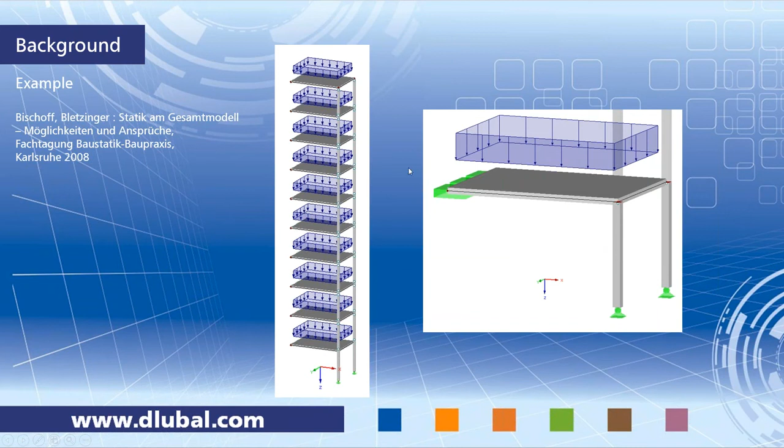The question is: does that calculation represent the real behavior of the build-up process, the real behavior of the structure? It's clear that the whole building with 10 stories is not built in just one second or one step—it's built step by step, meaning first the first story, then the next one, and so on. So the problem is that this staged construction is not part of the whole calculation, and this leads to wrong results.

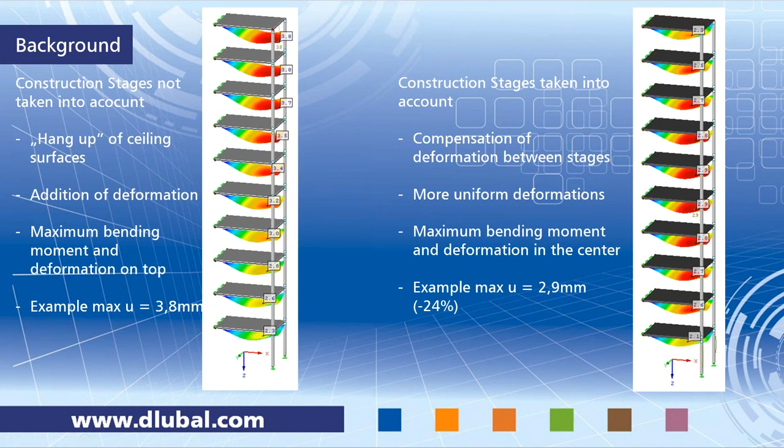So with this information about the construction stages calculation, we want to take a look at the features of our stages in the next slide. What are the features of stages?

Of course, you can add or remove elements. As I did in the example of the high-rise building, you can add columns, surfaces, and even solid elements in several stages. You can remove them, like for temporary columns, in the first or second stage, whatever you need. You can even modify elements - materials, hinges, and even supports.

You can also take nonlinear elements into account. That means you can follow tension elements, you can follow compression elements, because in our stages, the several stages are calculated by Newton-Raphson. And for a combination in a separate specific stage, you can use temporary loads.

That's the next point in this slide. What does it mean? For example, you have a temporary load like a crane or something like this in stage number 2, representing construction workers or a construction truck maybe, and you want to inspect a combination of different positions of this load.

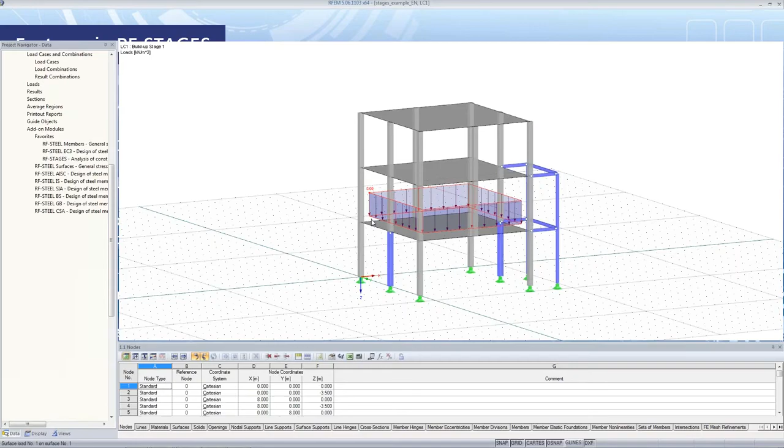So with these features, we want to move over to RFEM, and there I've already created a small model for today's webinar. We have a small building, concrete and steel.

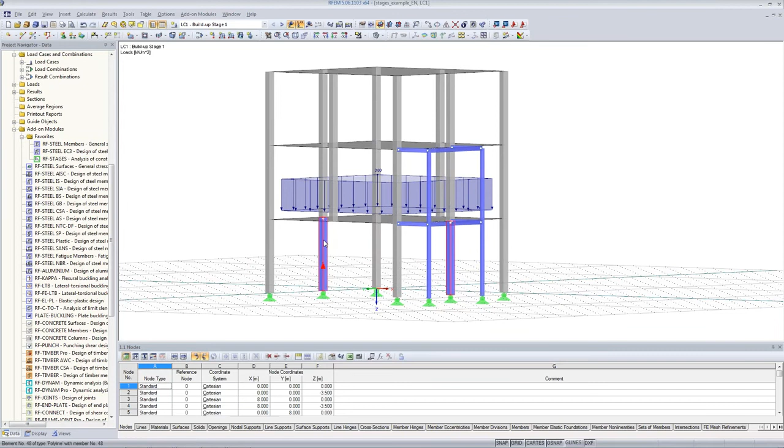We have 3 surfaces, a lot of concrete columns over there, and we have also temporary columns over there - these two steel columns and a small temporary platform.

I already created the load cases. It means we have build-up loads for stage 1, stage 2, and stage 3. And as you can see, it's an important fact that you have to split up the loads for the stages calculation. So I want to prepare 3 stages.

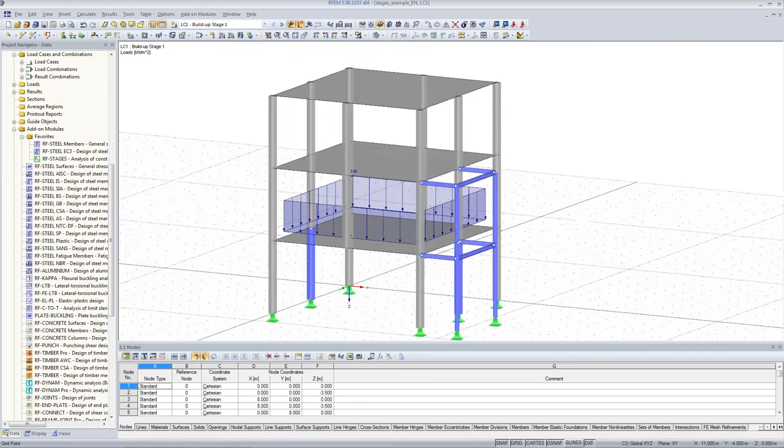That means the first stage is the bottom of the building, then the next part will be added in stage 2, and then the final stage, where I want to remove the temporary frame over there. In the second stage, I will already remove these 2 temporary columns. So it's important to split up the loads.

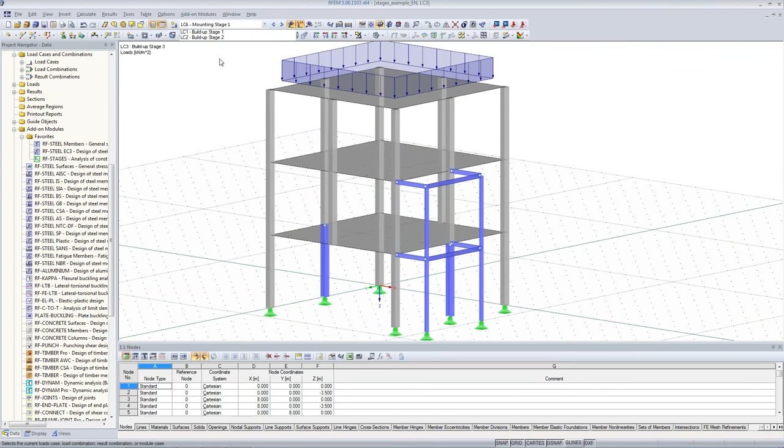This is built up for stage 1, stage 2, and stage 3. And we have also mounting loads - these are the temporary loads on our platform. So right now we want to start with the module of stages.

By double-clicking on this module, you will find general data, where you define the stages. We have 3 stages here. You can write down a description, or use a template like construction stage 1, 2, and stage 3.

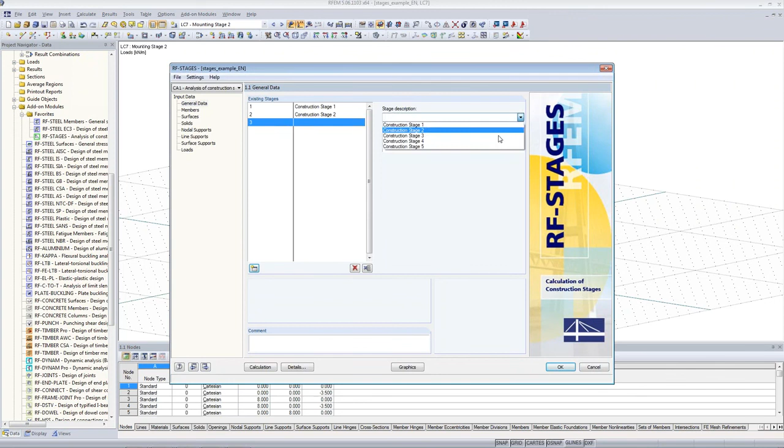Then we go on to the members dialog, where you add the members that will be added, removed, or modified in the particular stage. In stage 1, you cannot modify, delete, or remove anything since there's no stage before it. So we start by adding something: these are all the columns, and the 3...

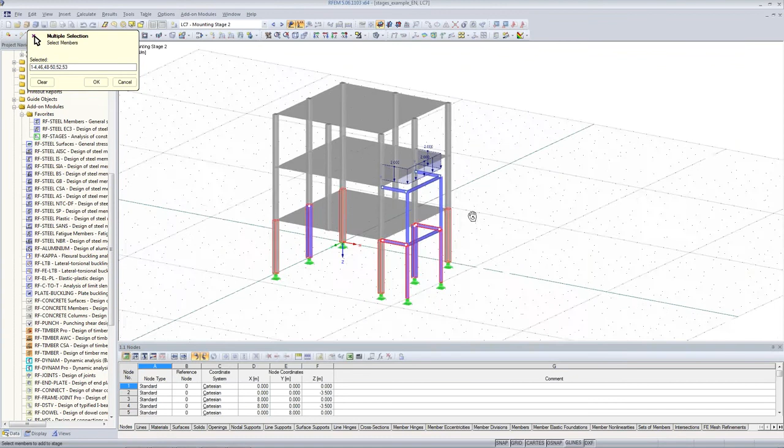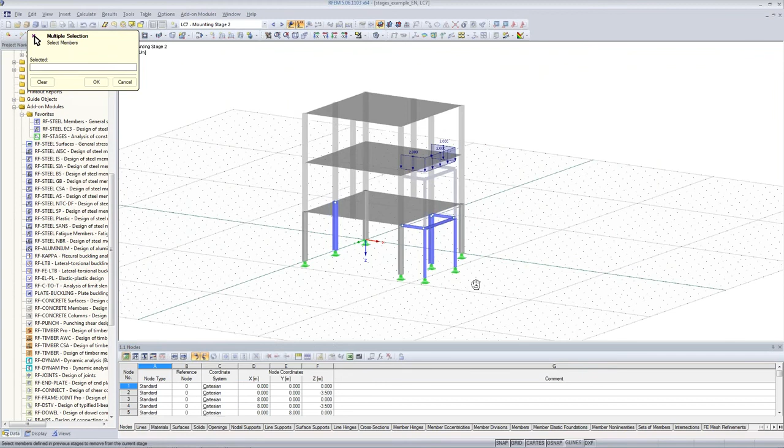...horizontal steel beams. In the next stage, we want to add not these columns, but these members. And we want to remove the 2 temporary columns at the bottom of the building. In the last stage, we build up the concrete columns on the 3rd floor and remove the temporary frame. As you can see in the graphic, you can follow the selection in the RFEM background.

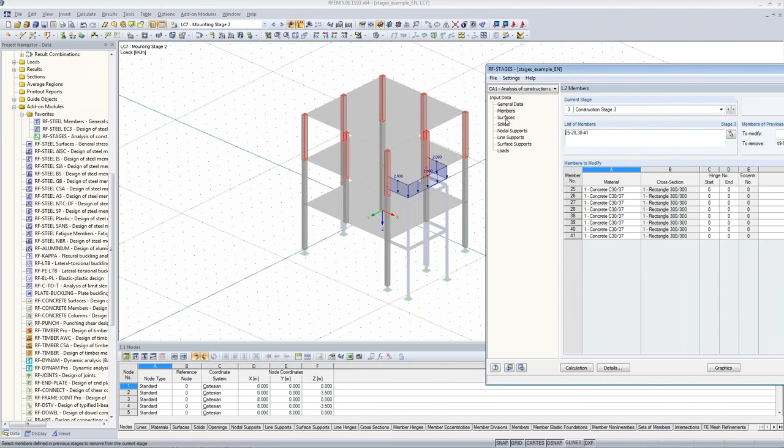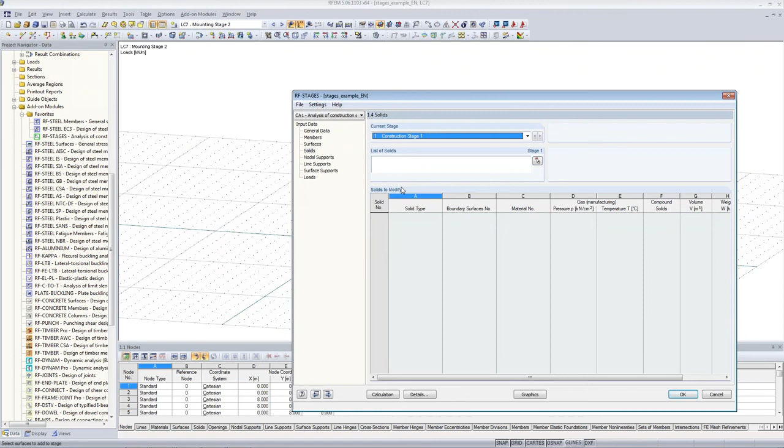So, construction stage 1, 2, and 3. Now we want to add the surfaces. That's quite easy: stage 1, surface 1; stage 2, surface number 2; and in the last stage, the roof surface. We don't have any solids in this model, so we can go on to the nodal supports.

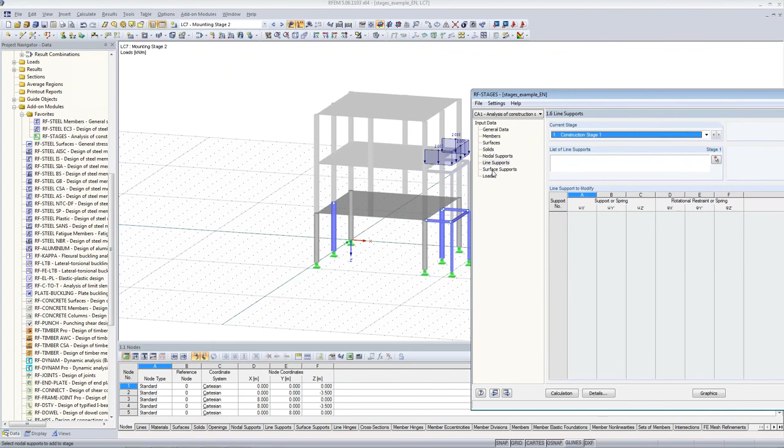We will just select all of them. We don't have to remove the nodal supports because the temporary columns will be removed anyway, so there will be no load left on them, and we can leave it as it is for all the stages. We don't have any line supports or surface supports either, so we can go on to the loads.

In our stages, it's possible, as you can see in this mask, to add permanent or temporary loads. The permanent loads are, for example, self-weight, or any load case or load combination that should be taken into account in every stage. So it's a constant load for all the stages, like build-up loads and live loads.

In this example, I created load combinations for the several stages. You can also use load cases or load combinations, or even use them together. In stage 1, I prepared load combination number 1, so I add this. Stage 2 has its loading as a combination, and so does stage number 3.

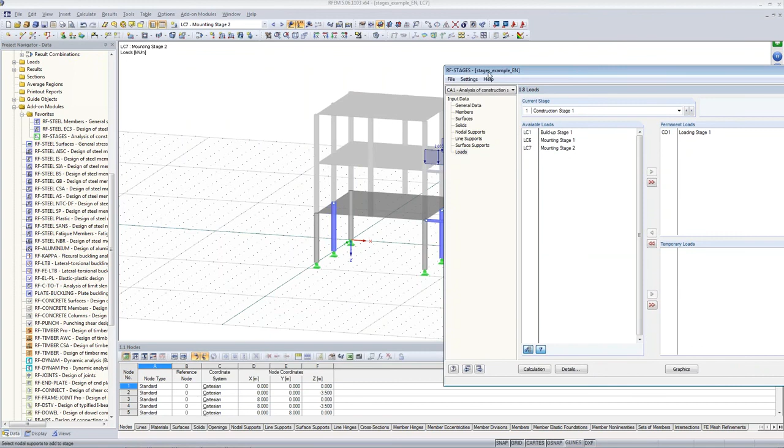What about the self-weight? Self-weight is a special type of load in RF-STAGES. You can add the self-weight as a separate load case for every stage. In this example, I could create 3 load cases of self-weight, but this is quite time-consuming, and in this combination there is no self-weight active because we can use the 'assign self-weight to all stages' checkbox.

And because I used partial safety factors in the load combinations, I want to change the factor in self-weight Z to 1.35, for example. On the lower left side, you can find the alignment of new elements, like initial position, which is exactly the same as in RFEM, or tangential position, which is the position of a new element relative to the last stage before—this might be more important for bridge construction.

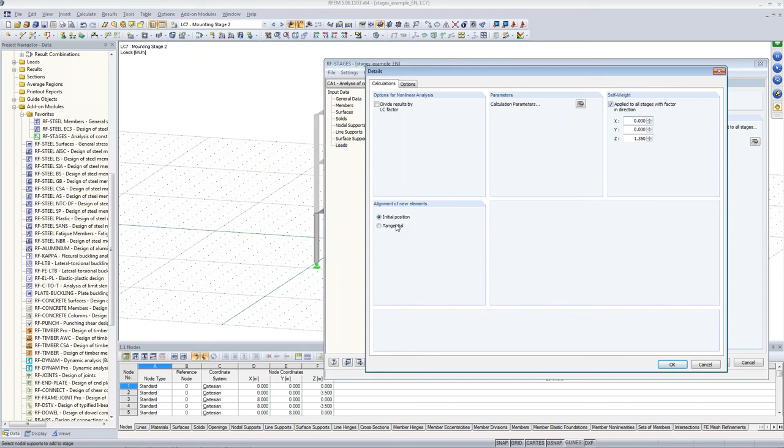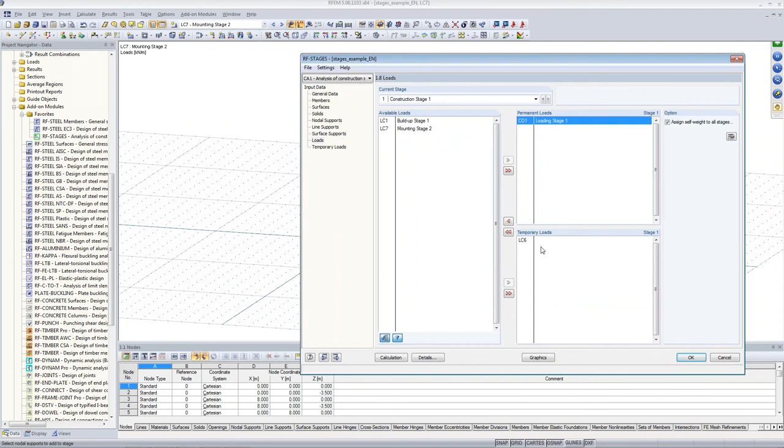What else? We have 2 mounting load cases, and these should act only in their separate load stage. So I'll add load case number 6, mounting stage 1, as a temporary load case for stage 1, and mounting stage 2 as a temporary load case in the second construction stage.

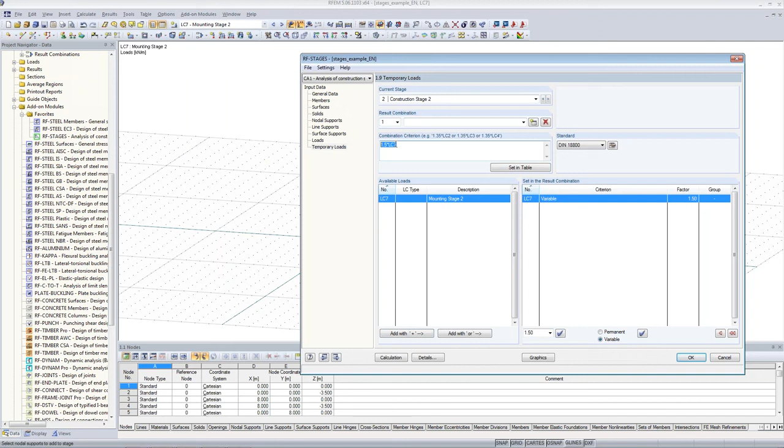To combine more than one load case, you could use temporary loads, but in our example we have just one mounting load case. So I'll add it with a factor of 1.5 for construction stage 1, and the next one for stage 2, also with a factor of 1.5, load case 7.

And with these definitions, we can start the calculation. You can see that there's a separate calculation for each construction stage.

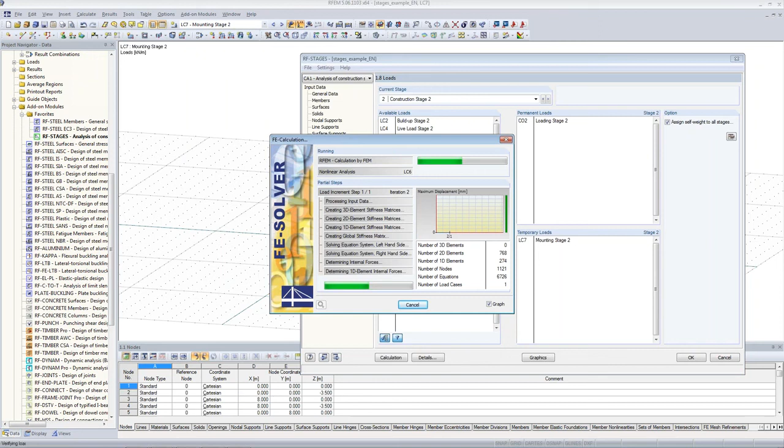After that, all these results are combined together as an envelope of all construction stages. So you can check the results in RFEM in several tables: results, nodal supports, for example, construction stage 1, the temporary load cases, and an envelope of all the construction stages, including temporary stages.

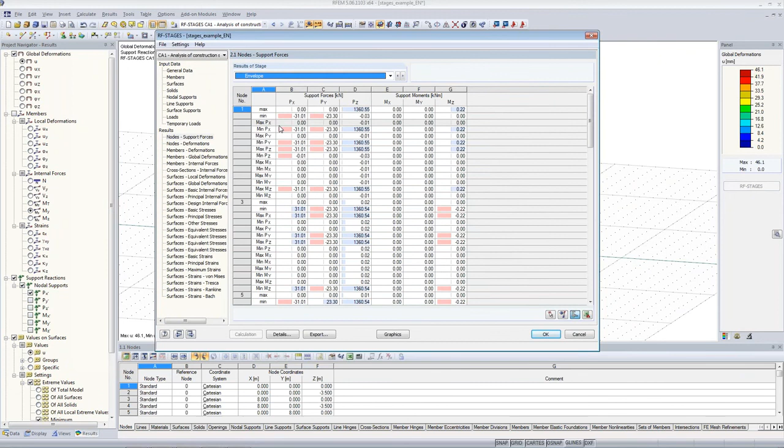Right now I could do nothing with these results. I can do no design because they are just in the module. To export them to RFEM, you can easily click on the export button, exit the module, and you will get result combinations in RFEM.

Right now we can just stay in the module and check the results in the graphic. On the right side you'll find a panel with the envelope, or you can take a look at one PLC, which is the permanent load case, permanent loads for stage 1.

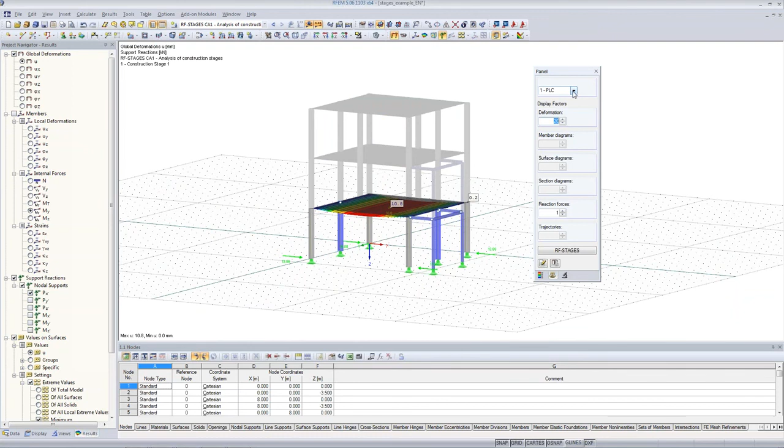We can take a closer look at the structure, and you can see that there was a temporary steel column, and there are no deformations over there. In the next stage, this column is removed.

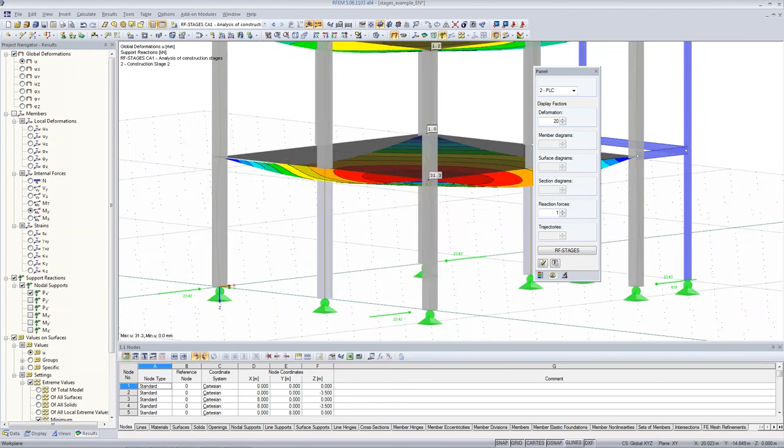In the next stage, this column is removed. It's in the background right now. You cannot select anything, and you can see a deformation on the ceiling in the second stage.

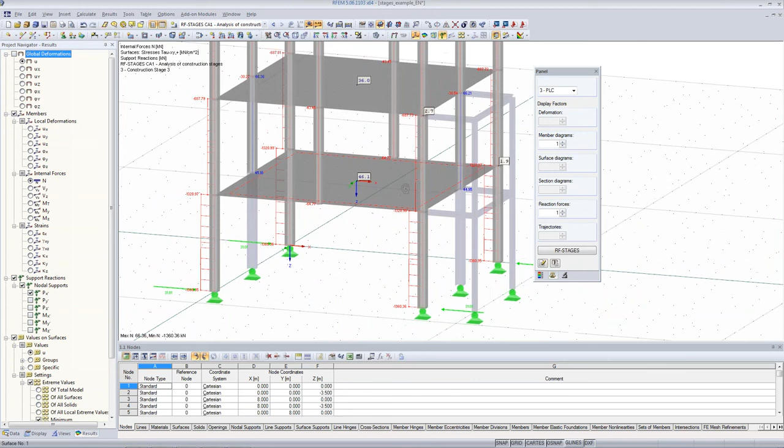You can check the normal forces in the temporary frame, and in the third stage you can see that this frame is also in the background. It's grayed out, so there's nothing there. It's removed in the last stage, and this is the final result, or final stage.

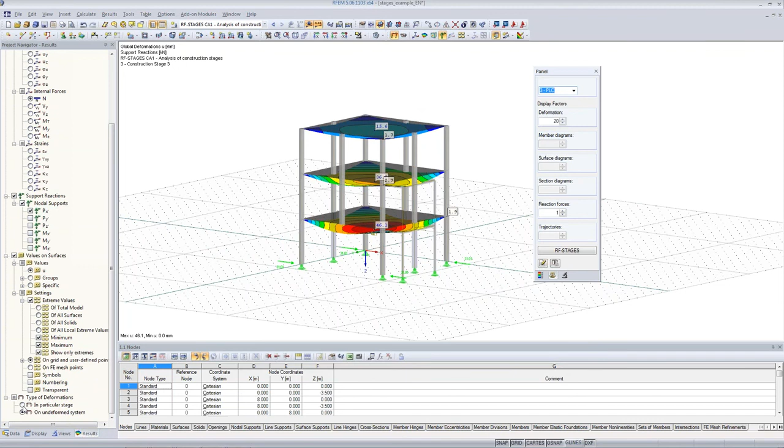I also talked about a feature to show the type of deformation, meaning an undeformed system or in the particular stage. If I want to know how large the deformation is in the last stage of the structure, I can change this option to 'in particular stage,' and you can see that in the last stage you get an additional deformation of 15.6 millimeters on the structure.

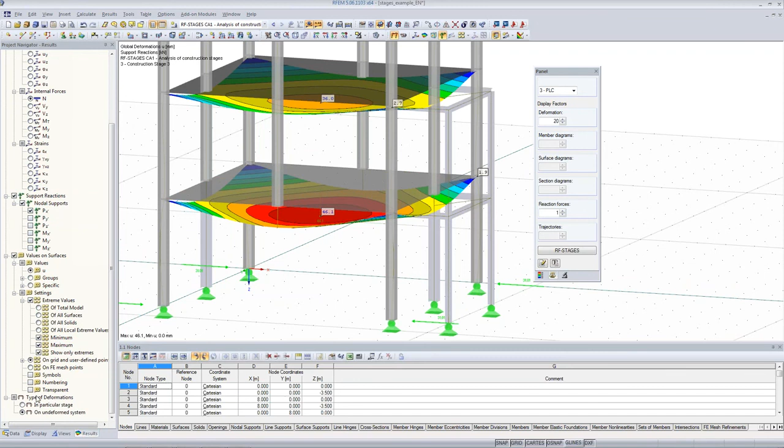On the undeformed system it's 46.1 for the first floor. That means the total deformation of this surface is about 5 centimeters, but in the particular stage, in the last stage, it is just 15 millimeters.

Right now I can do a small design with these result combinations of our stages, for example, in the RF-STEEL Members module. You can use these combinations, or you can just use the envelope to get a small elastic stress design, for example, for these columns.

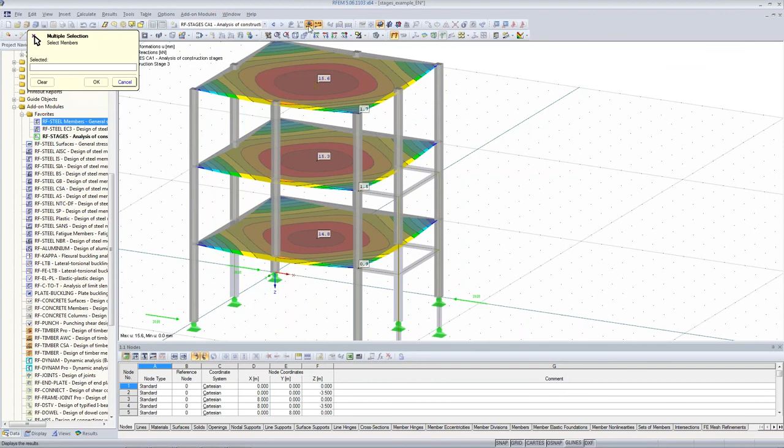First of all, I have to switch off the partial view mode to get these columns working. Cancel. Okay. Correct.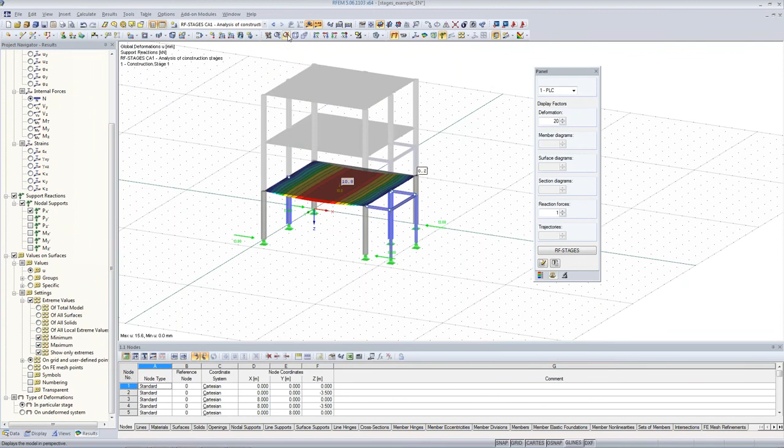So this is stages. Now I can use it in our Steel Members module, and I can add these columns for design, for example these two temporary columns, and I want to check the envelope of all the construction stages on these columns.

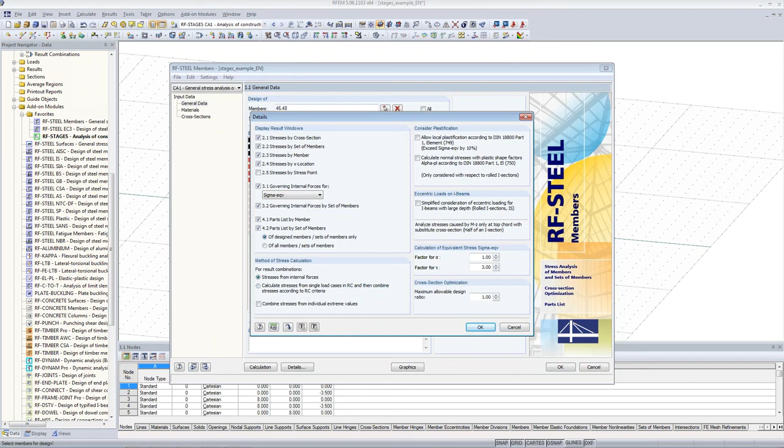Therefore, I will change the method of stress calculation for result combinations to stresses from internal forces and run the small design, and it's just about 7%.

With this small example, I want to close the presentation, and I will hand over to my colleague, Gerlin Schubert, for some additional information for you.